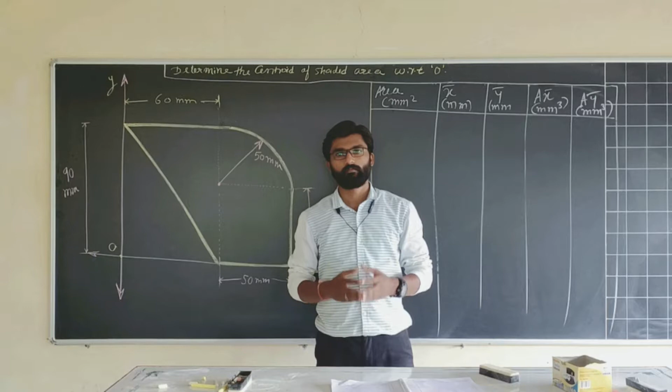Hello friends, in this video we are going to learn one more numerical on determining the centroid for a given plane area. The statement is: determine the centroid for a shaded area with respect to O. I'll mark the shaded area first. This is the shaded area given for which we have to find out the centroid, located with respect to this origin.

Now to get this shaded area, we can go with many ways. One way is you can first calculate this area of a rectangle, then add this area of quarter circle, then further add this area of small rectangle, and by adding all this you'll get the total area, and from that if you subtract this area of triangle you'll get the remaining shaded area.

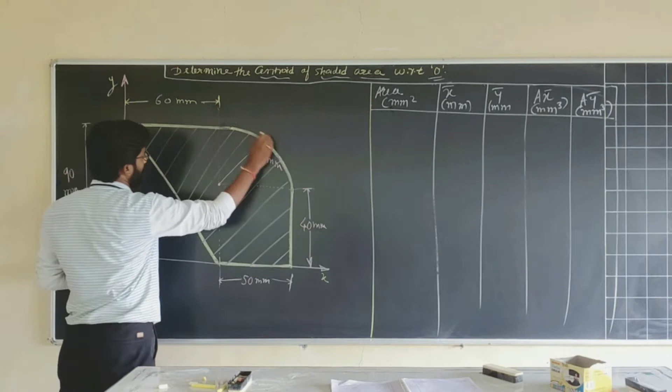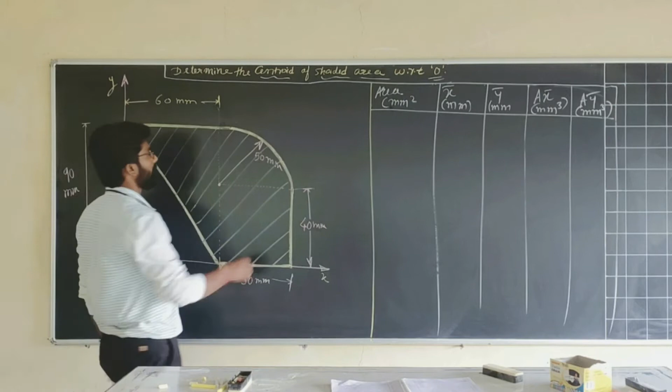If not, you can directly go with the area of this triangle, then area of this quarter circle, and then area of this rectangle, and adding these three you'll be getting your required shaded area. Now for this we have to locate the centroid, that is find x bar and y bar. The formula for x bar is summation of ax by summation of a, and y bar is summation of ay by summation of a. So we have to determine summation of ax, summation of a, and summation of ay to locate the centroid.

So now we'll divide this into certain known mathematical areas. We'll call this our first area, which is nothing but a rectangle. The second area of consideration will be this quarter circle, and this will be our third area of consideration. So we are going by the second way, adding these three to get our required shaded area.

So first we consider the rectangle. We all know the formula to find area is b into h. Here b is 50 and h is 40, so 50 into 40 will give you the area of rectangle.

Second area that we have considered is a quarter circle. The formula for area of quarter circle is pi by 4 into r square. Here r is equal to 50 as given. So pi by 4 into 50 square, the area you should get for the quarter circle is 1962.50 mm square, while the rectangle area will be 2000 mm square.

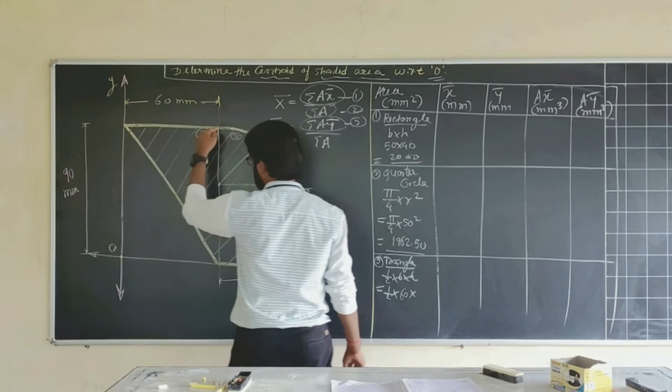Now we'll consider the third area, which is a right angle triangle. The formula for triangle is 1/2 b into h. Here b is 60 and h is 90 for this. If you solve this, you should get the area of triangle as 2700 mm square. So this is how we have got our three required areas.

Now if we add these three areas, we'll get our required shaded area, which is nothing but summation of a. Adding these three areas gives summation of a as 6662.50 mm square. This is how we have got summation of a.

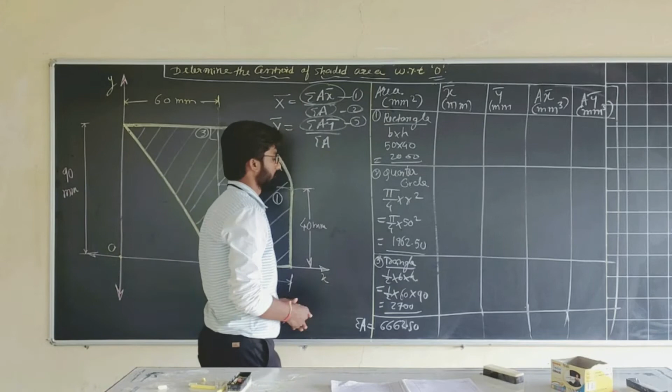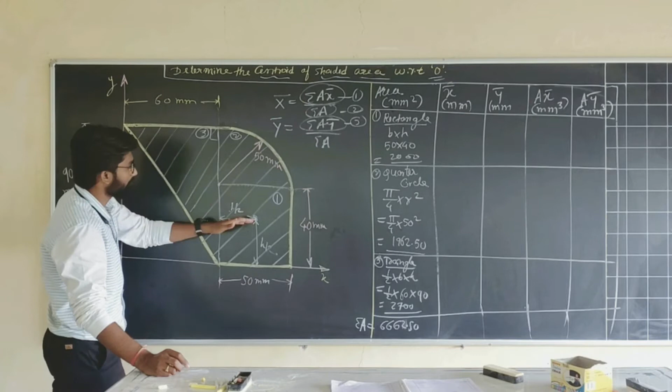Now we'll find out x bar and y bar for each individual area. The first area considered was the rectangle. We all know the centroid lies at a distance, from here, of b by 2 and h by 2. So we have located the centroid, but we have to locate it with respect to the origin.

So to find its x bar, that is the horizontal distance of this central point with respect to this y-axis, we want this - this is your x bar. Now from here to here, this distance is 60. So it's 60 plus b by 2. Now b by 2, since b is 50, 50 by 2 is 25, so 60 plus 25.

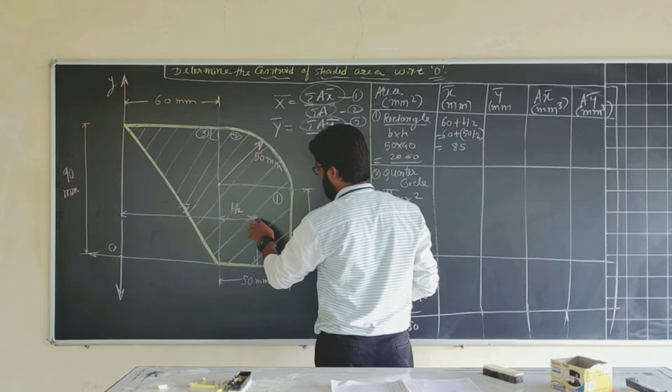So here it should be 60 plus b by 2, where b is 50, divided by 2. Then to find y bar, the vertical distance of the central point from the x-axis, that is nothing but equal to h by 2. H is 40, so h by 2 gives you y bar as 20 mm.

Now we'll find the x bar and y bar for the quarter circle. For a quarter circle, we know the centroid lies somewhere here at this point from the sides which make 90 degrees, and this distance is 4r by thrice pi. Even this is 4r by thrice pi.

Now to locate the x bar and y bar for this central point, x bar will be this horizontal distance of the central point with respect to y-axis. So this will be equal to 60 plus 4r by thrice pi, where r is equal to 50. If we calculate this for the quarter circle, the x bar should come equal to 81.23.

Now to find out y bar. Y bar is the vertical distance of the central point with respect to the x-axis. So this is what we want from here to here. We know this much is 40, plus 4r by thrice pi.

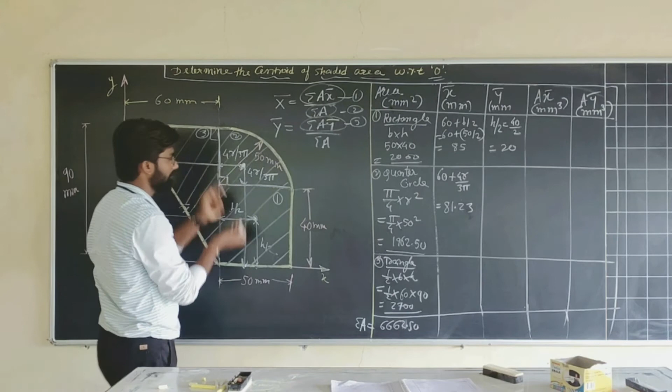So 40 plus 4r by thrice pi will give you the y bar. So y bar for the quarter circle will come around 61.23.

Now the last area that we have considered is the right angle triangle. For this, we know that for a right angle triangle, from the sides which are making 90 degrees, the central point lies somewhere here. This distance of the central point from the sides making 90 degrees, if this is b, will be b by 3. If this is h, this will be h by 3.

We want to locate this with respect to origin, that is find out x bar and y bar for this. So the horizontal distance of the central point with respect to the y-axis is your x bar. So what will be x bar?

Now to calculate this x bar, in this case we know total is 60, so 60 minus this. Now what is b? B is nothing but 60. So 60 minus 60 by 3, you will be getting this. So x bar will be 60 minus 60 divided by 3, equals 40.

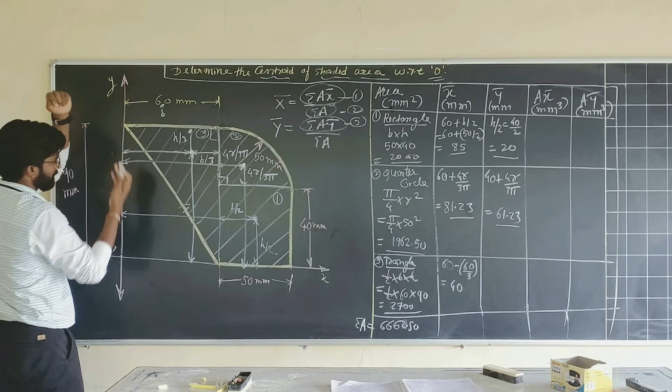Now for finding out its y bar, the vertical distance of this point with respect to the x-axis, this is its y bar. To find out this, we know total is 90, so 90 minus h by 3. Now what is h? H is nothing but 90. So 90 minus 90 by 3, you'll be getting it.

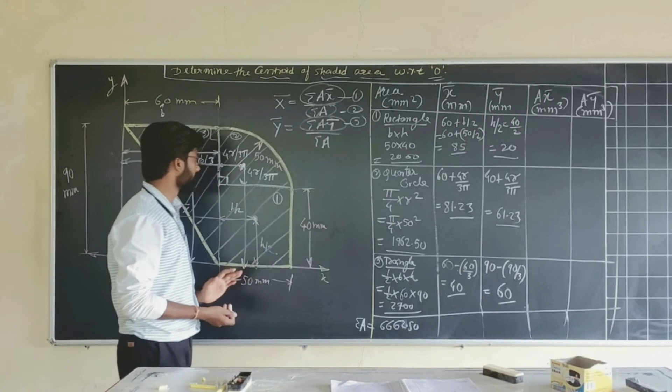Now if we check out all our x bar, y bar values for all these three areas, they are positive. Why? Because our whole shaded area lies in the first quadrant. That's why all our x and y bars are positive.

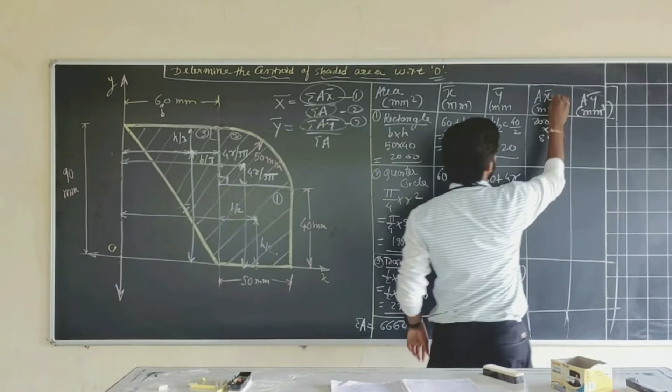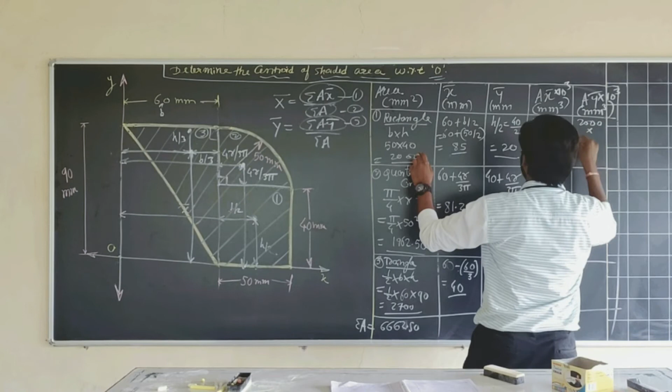Now to find out ax and ay, you just have to multiply the area a with x to get ax, and multiply a with y to get ay. So 2000 into 85, you'll be getting ax, and if you write it in terms of 10 raised to 3, you should be getting it as 170. And y bar, for the rectangle, 2000 into 20 gives you 40. There's a correction, you should be getting 2000 into 85 as 170.

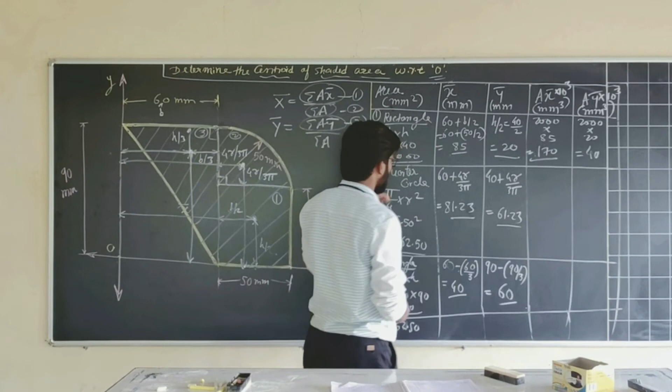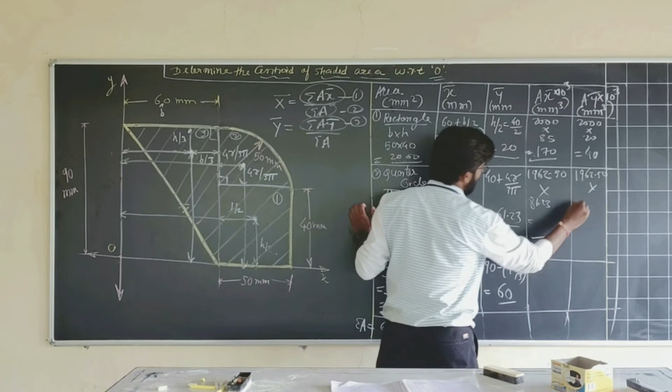Now for the quarter circle, the area 1962.50 into x is 81.23, write that down. Then for a into y, 1962.50 into y is 61.23, you'll be getting ay. So for the quarter circle, ax should be 159.4 into 10 raised to 3, and ay should be 120.16.

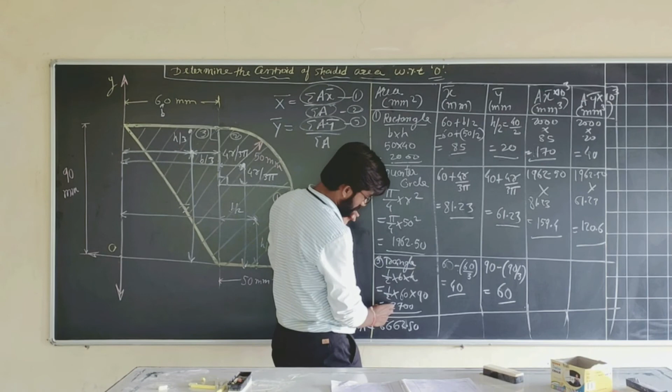Now we'll find out ax and ay for the triangle. So 2700 into 40, it should be equal to 108 into 10 raised to 3. Then 2700 into 60, it should be equal to 162 into 10 raised to 3.

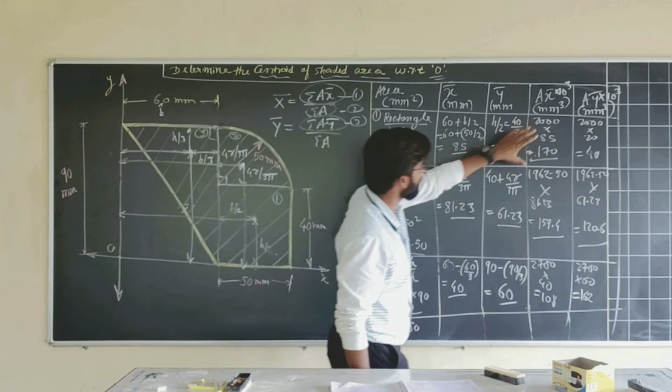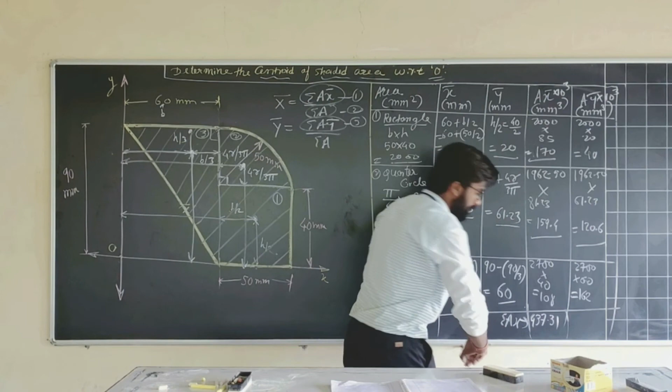Now we'll find out the summation of ax and summation of ay. If we add these, we'll get summation of ax as 437.31. This is your summation of ax, and summation of ay you should get equal to 322.17. This is your summation of ay.

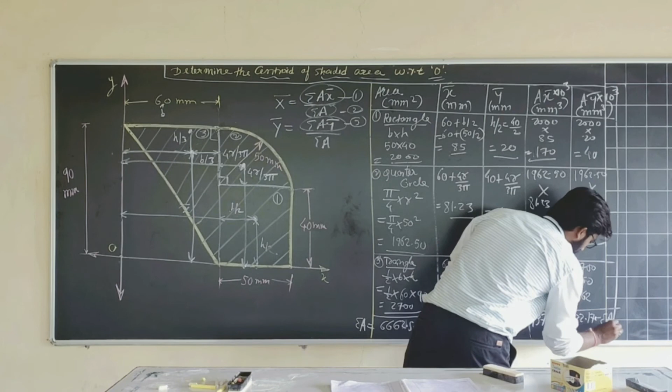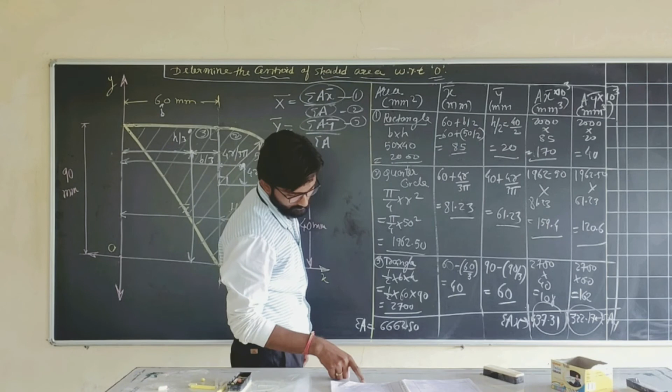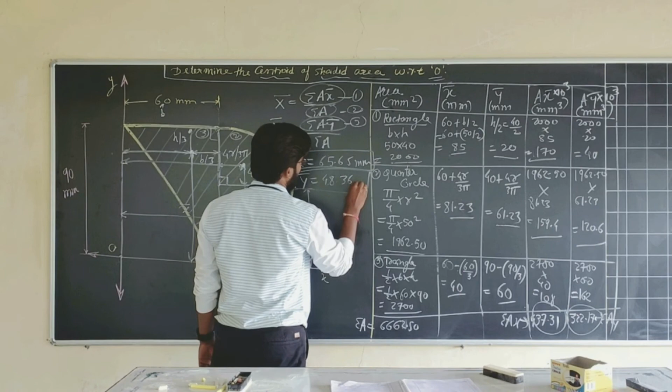So once you have the summation of ax and summation of ay, put them into these formulas. So x bar you should be getting equal to 65.65 mm, and y bar you should be getting equal to 48.36 mm.

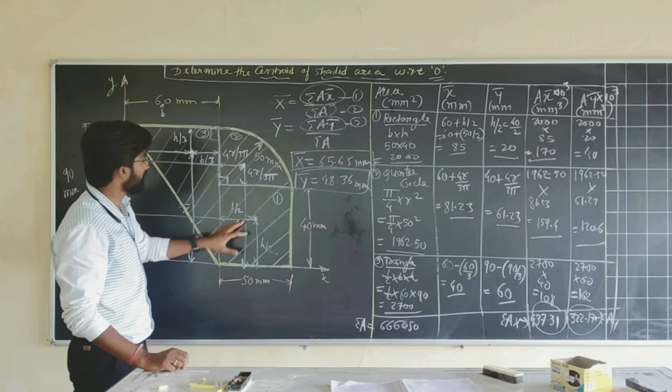So after putting down all the values, you got capital X bar and capital Y bar. This way, for the individual figures, we have the small x and y bars, and now we have located the final centroid for the whole shaded area, coming around 65.65 and 48.36. If we check this, x bar and y bar are both positive, meaning it lies in the first quadrant, which is obvious since all our figures were lying in the first quadrant.

Now x bar is 65 point something, and we know this much is 60, so it will lie beyond this. Y bar is 48 point something, and this much is 40, so the centroid will lie somewhere here. So this will be your x bar, 65, and this will be your y bar, 48 point something.